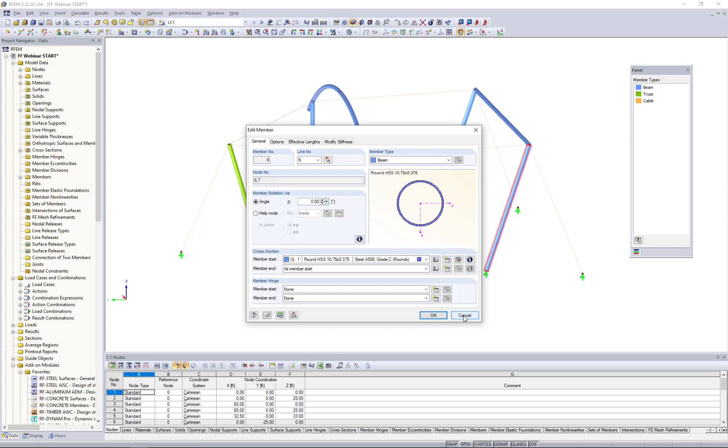What else we have in the model, which is a little difficult for you guys to see, are cable elements. If I turn this into a wireframe view, you might be able to see those a little better with this orange color. These cable elements are required to essentially hold up these frames before we have even applied the membrane, fabric membranes to the structure. This is true for out in the field as well. They provide stability for our columns and our center frames here.

If I double click on one of these elements, you'll see that the member type is set to cable. I've defined them as 5/8 inch diameter, and I've also applied my own user-defined cable materials. If you don't see the applicable cable material within the program RFEM, then you can always create your own user-defined material, and this information should come directly from the manufacturer.

Once we have modeled this starting structure, I think it's important to make sure that we run a simple load case. In this case, we'll run dead load or self-weight, just to make sure that the structure is able to stand up on its own and has stability. Again, this is all before applying those fabric membranes to the top of this tent structure.

We can go in here to our load cases and combinations. You'll notice that I have already created the first load case, and we can call this dead load. The self-weight is activated as -1 in the Z direction.

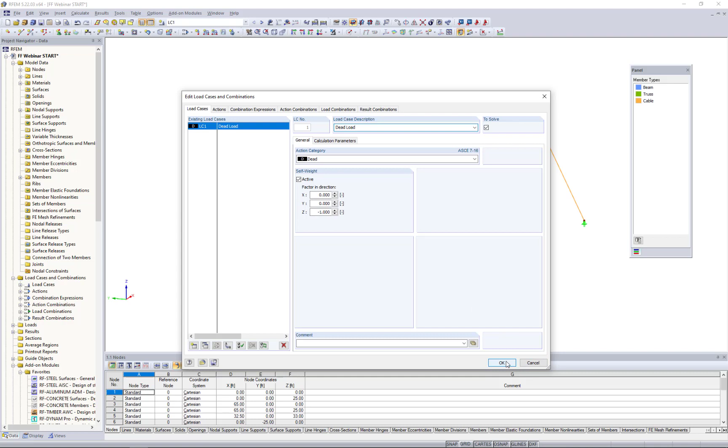So once we have applied this self-weight load case, we can run the calculation, which I've already done within this saved model, and we're presented with our global deformations. The fact that the model has solved is certainly a good starting point. We know that there is stability within the main structure here.

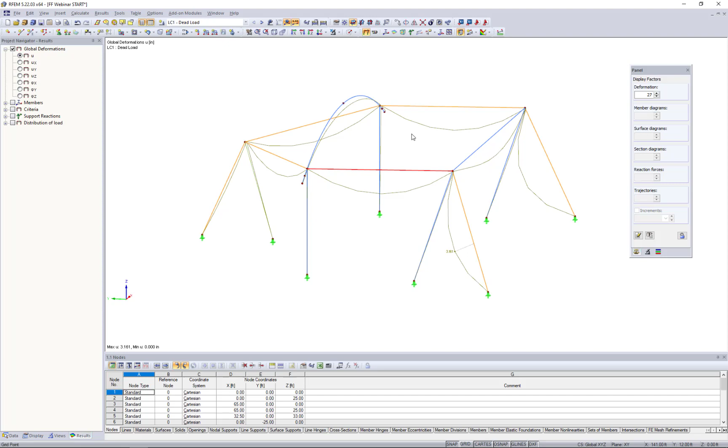Now, of course, when we're looking at the sag displacements here for our cable elements, this certainly isn't ideal, but we'll go ahead and address those a little bit later on in the presentation. Essentially, like I said, we wanted to make sure that we had stability here for the main structure.

So to begin modeling the fabric membranes and the boundary cable elements, I'm going to start off by selecting this node at the bottom of my frame column. I'm going to use my Move Copy tool, which we can find up here within our toolbar. We're going to create one copy, and then we simply apply the displacement vector. In this case, it will be negative 6.5 feet, negative 15.75 feet, and 8 feet. I click OK, and now you can see this arbitrary node created in between those two frames.

I'm going to draw a new line element, and a line element is exactly as it sounds. It's not necessarily a member, it's not a surface, it's just a simple line element defining some additional boundaries here. So I'm going to snap to that node that I just created, and we'll snap up to the top of our frame. On the right hand side, we can right click to exit these dialog boxes, so just a simple triangular shape shown here. I'm going to take that newly created node and use the Move Copy tool once again.

To create one copy, my displacement vector this time in the X direction is going to be negative 3, 3 in the Y, and in the Z it will be negative 8. The purpose for this node is we want to eventually create those fabric membranes here, but we need to anchor them down to the ground.

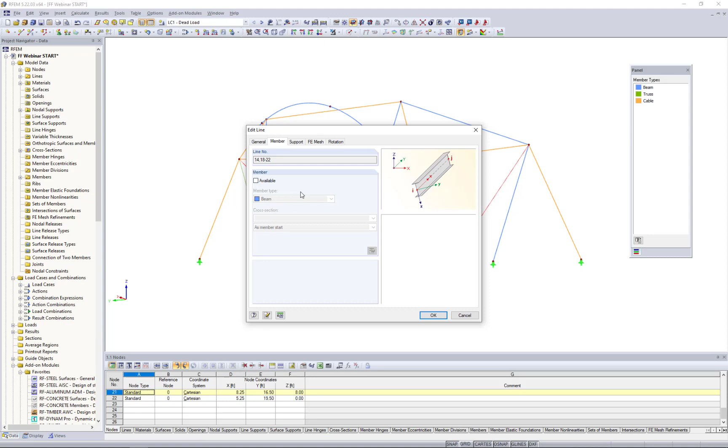Okay, so currently these are just typical line elements as we mentioned. What I can do is to highlight to select them, hold down my Control key, select the adjacent 3, and I'm going to double click on these line elements. We have the ability under this second tab to assign a cross-section and material to the line to convert it into a member. So I'm going to do that here, but instead of a typical beam type member, I'm going to create a new cable element.

Now, typically I could create this cable element, assign a new cross-section, maybe a new material, but I already have cable elements defined within the model, and I want to use this same diameter, this same material, so I can simply select it from my drop-down box here.

I click OK. The program asks me to clear the results, that's fine, and now you can see the member information is given to me within this dialog box, and these lines are now orange to indicate that they are cable elements. We'll take these same 6 cable elements, we'll highlight them holding down our Control key, and we're going to take advantage of our mirror tool.

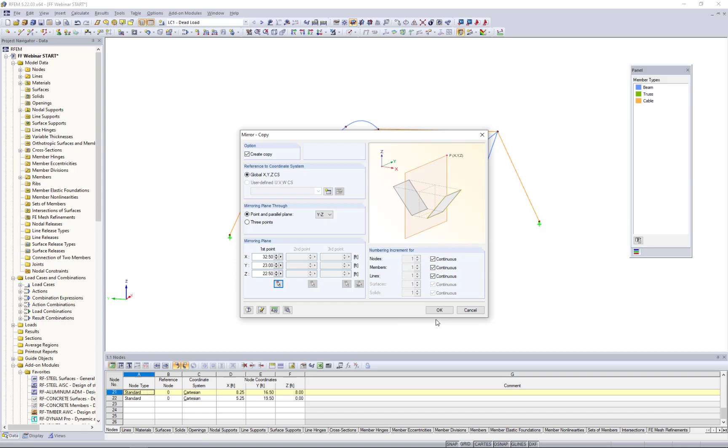The mirror tool can be found up here in the toolbar. What this allows me to do is to create a copy by mirroring about the YZ plane, and I can select the point to mirror about. For this, we can just choose any point that's at the center of this structure, and we could choose the top of the center column, for example. You'll notice the coordinates are automatically populated for me here.

Rather than having to redefine that geometry on the other side, we simply copied over those cable elements to the other side by using the mirror tool.

Now the final thing to do with these boundary cables is to apply supports to the bottom of them. You'll notice that the rest of the structure has nodal supports applied, and the type of support here is just a typical pin. You can see that I have fixed translation in the X, Y, and Z, but I have released the moment about X, Y, and Z.

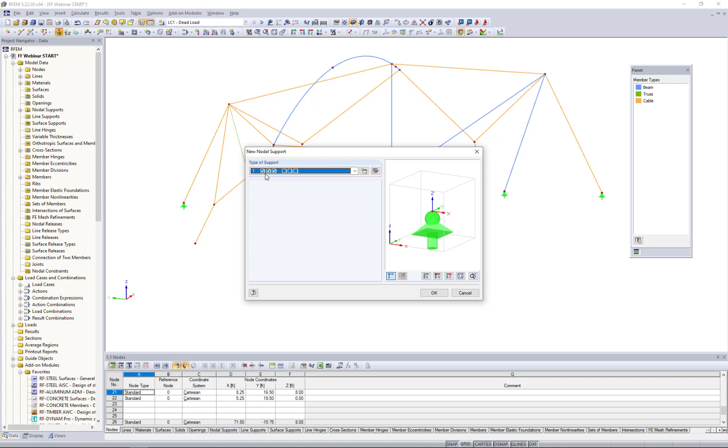So sticking with the same methodology, I can apply that same nodal support to the bottom of these anchoring cables by going up to my tools and choosing new nodal support. I don't need to redefine that definition type since we already have it available in our model, so I can use the drop-down box to select my pin support. I click OK, then simply click on the bottom node of those anchoring cables, and now we have all the supports applied.

This really finalizes the cable elements, and what we'd like to move on to next are the fabric membranes, which will be created with surfaces, 2D surfaces within the program.

Now the problem with all of our surfaces available here in the drop-down is this makes the assumption that the surface will be in a single plane. For our complex structure today, the surfaces certainly won't be in a single plane. So instead we can use a tool a couple down - we want to apply a new quadrangle. A quadrangle does not require the surface to be in a single plane, and we'll see this as we begin to model here.

Now we want to define a new material for our membrane, so we'll select new material and give it a description of membrane. The material model will be selected from the drop-down as orthotropic elastic 2D, which allows us to define two different stiffnesses in both the X and Y direction.

This information should come directly from the manufacturer for whatever fabric material you're using. Let's say our manufacturer has given us the stiffness in the X direction as 1 gigapascal, but notice my units here are KSI. So a nice trick within the program: if you don't want to manually convert gigapascal to KSI, type in 1.0, then manually type capital G, capital P, lowercase a for gigapascals. When I click in the next cell, the stiffness is automatically converted to KSI, 145.04.

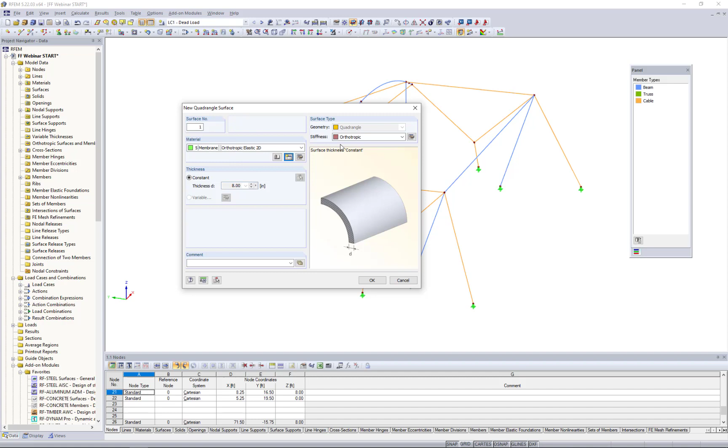So now we have defined those material settings for my fabric membranes. We want to change the stiffness type to membrane orthotropic, and go into the detail settings. Under the second tab is where we'll set the thickness of the membranes at 0.04 inches, and I click OK.

So now that we have defined the material as well as the stiffness properties, I can click OK, and now we're ready to begin to define the boundary lines of this surface. For this, I'm going to orient my model in the plan view, choosing the reverse Z direction from my drop-down box here.

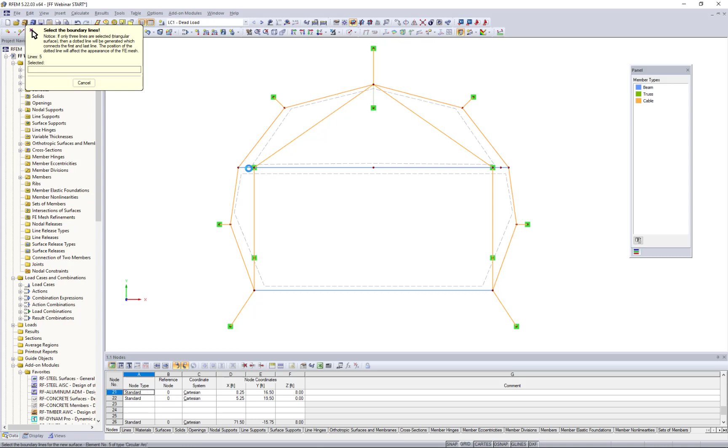To define my first membrane, I'm going to select the members, including the cable elements, that make up this first membrane. Once I close the loop here, you'll notice a dotted line, indicating my first membrane. We'll do the same at the front of the structure, selecting each member in order, and once we close that loop, we should see a dotted line up at the front.

So I can right-click to exit. Let me turn this back into an isometric view, go back into a rendered view, and we can see those fabric membranes applied to the structure—certainly not in a single plane. That's the advantage of using that quadrangle feature.

Now, everything I have modeled so far has been completely straight lines. The cable elements are straight, our fabric membranes are straight lines, and realistically, once we apply pre-stress, we're going to see biaxial curves for our fabric membranes. Our cables may have some catenary shape to them.

This is where we want to take advantage of one of the add-on modules available within RFEM called RF Form Finding. This add-on module allows us to define predefined properties such as pre-stress forces, cable sags, and so on, and it will find the deformed mesh for us before we continue with the static analysis.

A simple way to explain this: the cable elements are completely straight. Form finding will allow us to define a cable sag, for example. We run the form finding process, and then the program will come up with the catenary shape for us.

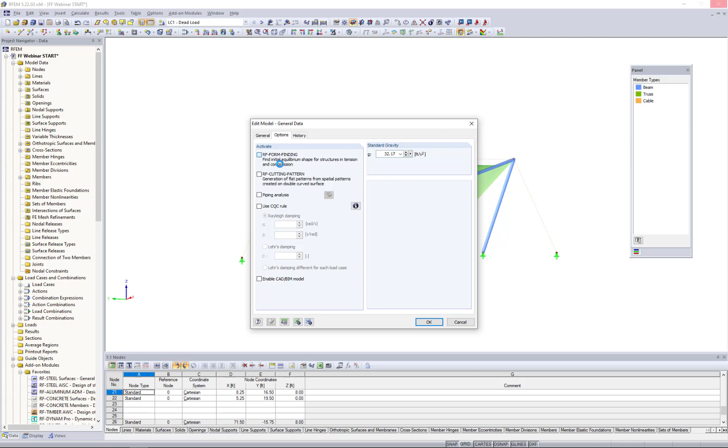To activate form finding, I go to my project navigator and right-click on the model name to access the general data. Under the Options tab, we have RF Form Finding. I simply check this checkbox, and the program will activate this add-on module within my model. I click OK—nothing has changed yet, but we'll see in a minute the features it has released within RFEM to allow us to run that form finding procedure.

I'm going to go to a plan view once again, the reverse Z direction, and turn this into a wireframe view. I'm going to select my two cables in the rear here by holding down my control key, so we can see them highlighted in red. I'm going to double click them.

RF Form Finding has now given us the ability to edit the member type—this was previously not available to us. We can define the cable target length, the sag, or the pre-stress force within the cable. For these two rear cables, I'm going to assign a pre-stress force of 0.225 kips.

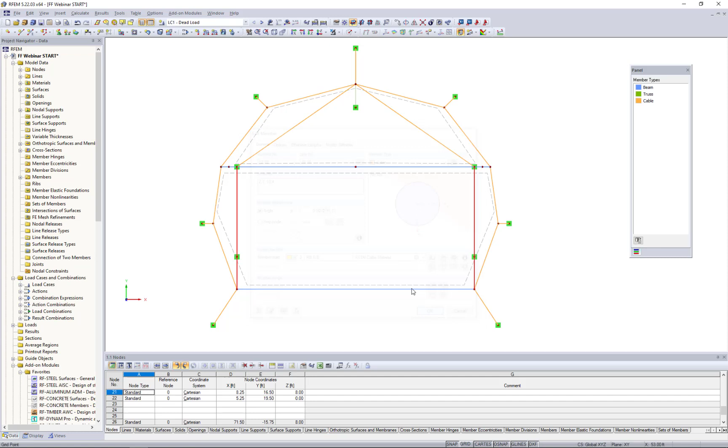When I click OK, nothing has changed so far—we're just defining these pre-stress forces. What I want to do is the exact same process for my front three cables as well as my two rear cables. Remember, this is all part of the primary supporting structure.

I double click on these elements and go into the detail settings here. For these, I'm going to assume that the pre-stress force I place in these cable elements spanning between my two frames will inevitably impact the rest of these cables for the supporting structure. So for these, I'm going to set the target length to 100%—as I modeled them now, I don't want that length to change. I click OK.

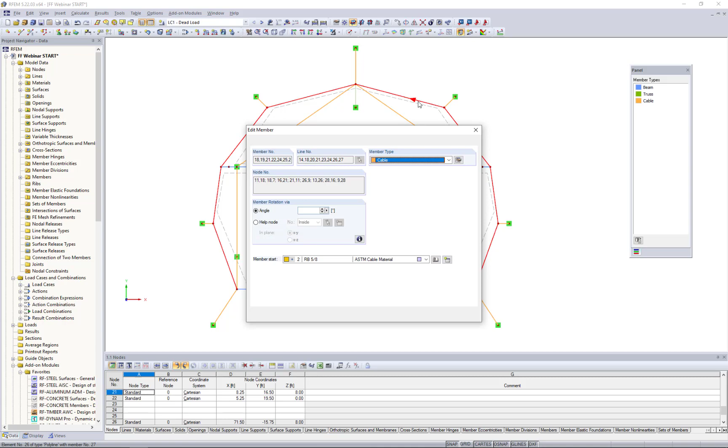I'm going to move to my boundary cable elements on the exterior of the structure. Remember, these are useful for defining the boundary conditions of the fabric tensile membranes. I can double click on these and edit them. For the properties here, I will define a target cable relative sag of 10%. We can also refer to this picture over here on the right to determine what the sag should be set to. I click OK.

Finally, our last four cables are the short anchoring cables that attach the fabric membrane down to the ground. I double click on these, edit the detail settings, and set a pre-stress force quite a bit higher, at 6.75 kips. I click OK. If we're curious to see visually those pre-stress loads defined, I can select RF Form Finding from my drop-down box here and turn on the display of my loads.

So we can see how those pre-stress defined loads apply to each cable element. This is just a good way to check to make sure we didn't miss any of those cables.

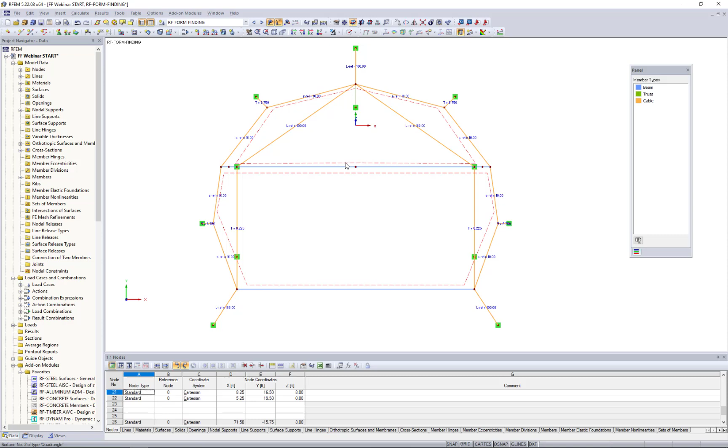Now, similarly, we want to apply some pre-stress settings to our fabric membranes. For this, I'm going to select my two fabric membranes by holding down my Control key, and I'll double click on them.

Now we've already been within this dialog box before. Remember, we set the thickness of our membranes here. But what we did not see before was this form finding tab, and this allows us to define a pre-stress force or stress in the warp and weft direction, which is the X and Y axes of our fabric membrane.

Now we will be applying a standard calculation method. The projection is more for conical type structures, so standard is more for flat elements. We do want to apply a pre-stress force, and we'll actually just keep this as the default of 0.07 kips per foot. And I can click OK.

So once we've applied those pre-stress settings, what I can do is go back into an isometric view. Let's turn off the display of our loads. Let's go back to a rendered view. And we want to have RF form finding selected from our drop-down box here.

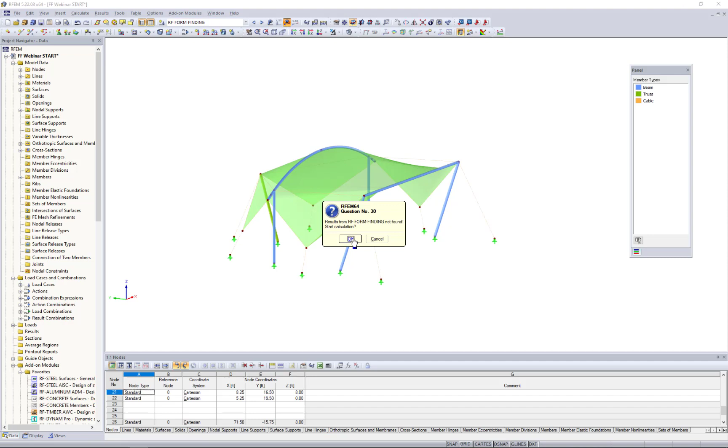I'm going to start the calculation by clicking on this Show Results button. So what the program's doing now is just applying all of these predefined pre-stress forces from our cable elements as well as our fabric membranes to the structure, and then it's going to come up with the relevant shape for us. So we can see the initialization of the calculation method here, and we should see a progress bar as well, just showing us the max displacement for every iteration.

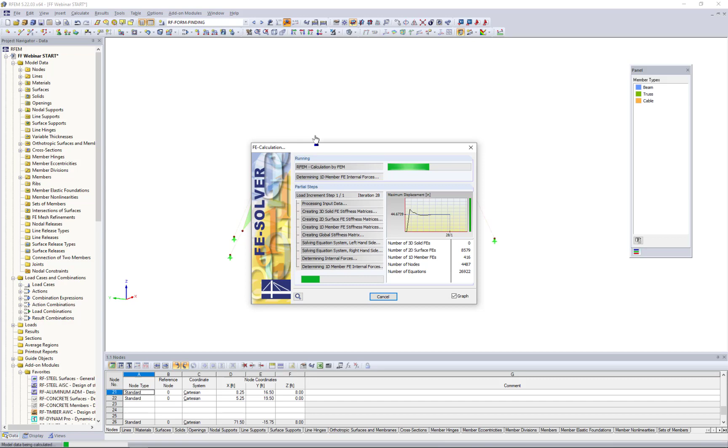So after this iteration is complete, what we'll be presented with immediately in RFEM is the deflected shape. Now what you'll notice is that my FE mesh, which is displayed here, now has this curvature to it. Again, the cables have a catenary shape, and the fabric membrane has biaxial curves. This would be the FE mesh that we would move forward with then for the additional static analysis.

Now, before I do, I want to explain a little bit about the results that we have available to us here. Under the Results tab, we can go ahead and collapse most of these trees, and we want to take a look at the surfaces tree, in particular the shape for the contour lines. So we can compare this to our colored panel over here to see where we have higher contours versus lower contours. We can view inclinations.

For example, we'd expect higher inclinations here where the fabric membrane is a little bit more vertical than our flat membrane up at the top. So this is just a way to double check this form finding shape.

Now, with that said, going back to the deflected shape here, maybe we change our deformation factor to 1.0. I'm going to take a look at the elevation view. And the rear part of the structure looks fairly adequate for the curvature that I'm seeing, but the front part of the structure, I'd really like to see a little bit of a higher curvature here.

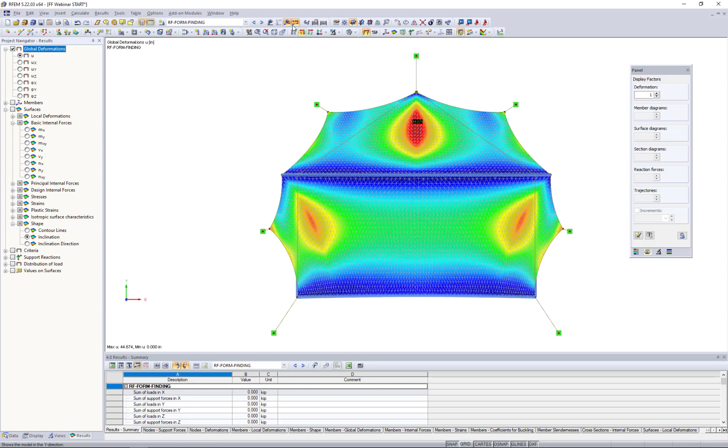So that's fine, we just need to manipulate maybe the pre-stress settings. But also I want to point out, if we go into an elevation view and maybe I turn off my results here, let me also turn off my FE mesh. I'm going to right click to turn on the local axis system of my membranes.

So remember, for our membrane material that we got from the manufacturer, the material is actually a bit stronger in the X direction versus the Y direction. So you can imagine that this is really important then for the placement of our local axes for these membranes and in which direction they span.

Currently we have the X direction spanning parallel to our main frames here, and the Y direction is perpendicular. What I'd actually like to do is to rotate that. I want the Y direction to be parallel to these frames.

So I can do so by selecting both of my membranes, double clicking them, and under the Axes tab, you can see that we have the ability to set the local Y-axis parallel to a line that I can choose within my model. And I can just choose either one of the frame beam elements, line number 8 here.

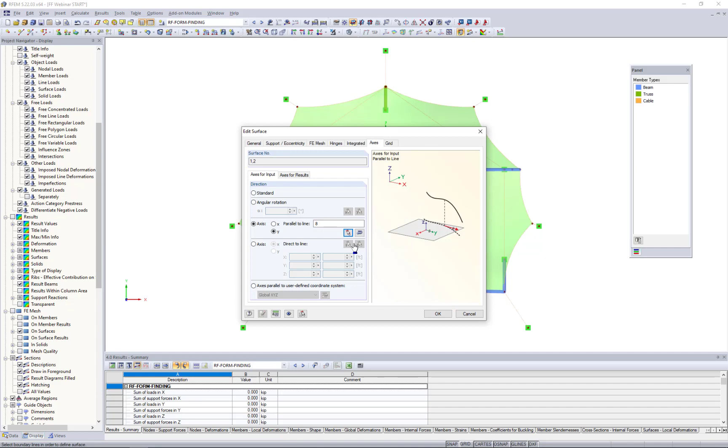I click OK. Through these dialog boxes, the program tells me it has to clear the results. And you'll notice now the Y-axis is parallel to those frames, the X-axis is perpendicular.

Now, in addition to this, I'd also like to go back to this General tab, and under the membrane settings and the form finding tab, increase the pre-stress force in the y direction. By manipulating the orientation of my x and y axes, I now have the ability to set a different force in the warp versus the weft direction. So in the y, we'll double this to 0.14 kips per foot, and leave the x orientation the same.

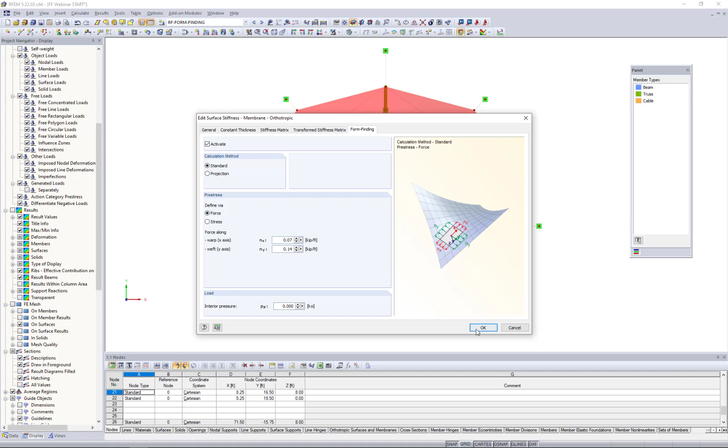I can click OK through these dialog boxes, and what I'd like to do again is apply the RF form finding calculation. I've made no changes to my cable elements, so those should stay the same, exactly how I had them defined before with the sag and cable length. We just modified the orientation of these surfaces as well as increased the predefined stress in the y direction.

Once the program has solved for this new shape, we'll again be presented here with our deflected shape in RFEM. I can right click to turn off the local axes of the system. We're currently looking at the deformation. Let's take a look in the elevation view, and change the deformation factor back to 1.0. You can see a nice curvature here in the front, a little bit higher than what we were previously seeing before.

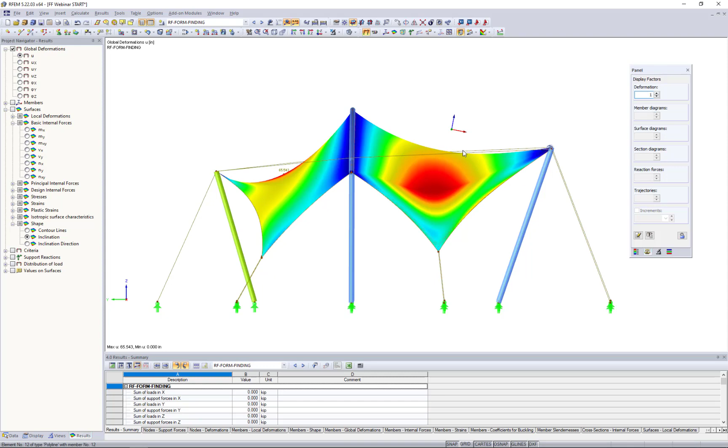The other thing to check are the surface internal forces. For our NX forces, this would be the tension along the local x-axis, we should see about 0.07 kips per foot, because remember, this is a pre-stress force that we applied. Although it varies slightly, the average here is about 0.07 according to this color panel. In the NY direction, it varies a little bit, but as we'd expect, the average value is about 0.14 kips per foot.

So just to compare the pre-stress force to what we're actually seeing after the form finding process, everything looks good. This is the new shape that we're going to move forward with for the additional static analysis. So the next load case that I'd like to run here is snow load.

I'm going to go up to my load cases and combinations. We're going to create a new load case here, and this one will be called snow load with the action category set to snow. I click OK, and make sure that I have snow load selected in my drop-down box up at the top.

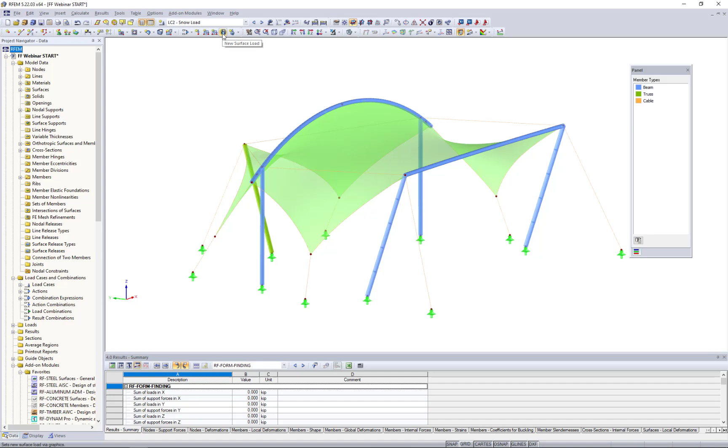We want to apply a new surface load, and we can do so within our toolbar. We have new surface load here. For the snow load, I'm going to apply this in the projected Z direction. So we might be wondering, what's the difference between the projected Z direction versus related to the true area?

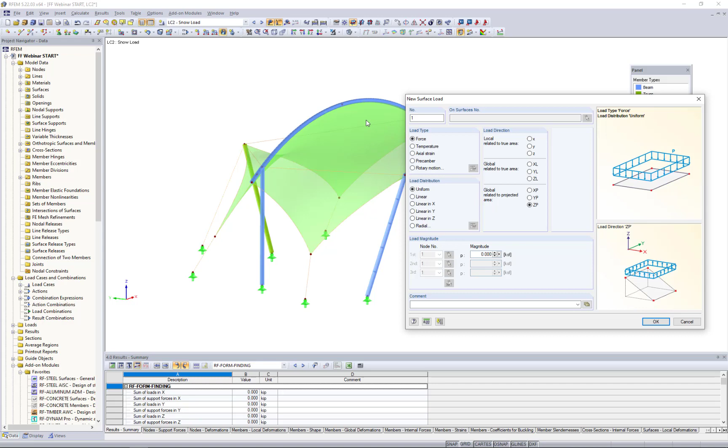With the projected, this will actually take into consideration the angle of my fabric membrane. So we'd expect with snow loads, the snow would probably slide off when we're looking at the edges here of our fabric membrane that are almost vertical. But up at the top, where we have a pretty flat area, we'd expect to see higher snow loads. So that's what the projected area allows us to do.

The magnitude here is going to be fairly small, negative 0.006 kips per square foot. The reason for this, maybe we don't expect this tent or canopy to be operating during the winter, but we still want to account for some snow load. I click OK, and then it's really just as easy enough to select my two surfaces here. Now you can see the surface loads applied to the top here in the projected Z direction.

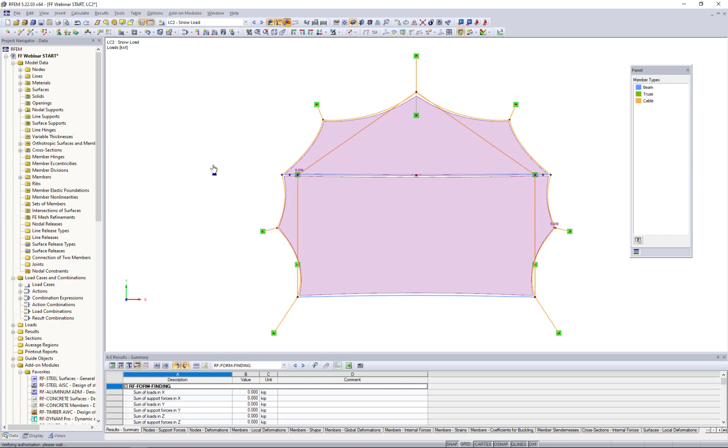We also can view a plan view, and I'm going to go to a wireframe view. Those same area loads have now also taken the shape of my new form finding mesh here. So we can run a quick analysis for snow load. The program, again, doesn't need to solve for the form finding shape, we already have that. It's just simply going to apply the snow load here in 5 load increments, and eventually we'll be presented with our results.

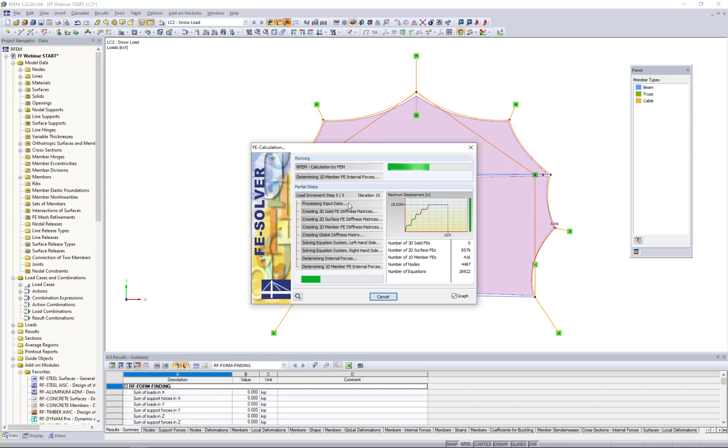I like to do this just to make sure that the load case we've just applied makes sense with the deflected shape. We don't have any modeling inconsistencies. So once this is done solving, again, we'll be presented with our results here.

Let's go back to an isometric view and take a look at the global deformations, with the deformation factor set to 1.0. So as we'd expect, we have higher deformations at the top here, where we're going to see more snow load accumulation, rather than out at the exterior where we have steeper angles. So everything looks okay there.

All right, so the next thing to move on to are wind loads. And for this, we're going to utilize one of our new programs called RWIND Simulation, which runs a computational fluid dynamic analysis. Essentially, we're going to take this structure, integrate it within the standalone program RWIND, and put it inside of a numerical wind tunnel.

The purpose of the numerical wind tunnel, if we relate this to ASCE 7 or any other international standard, is that it's quite clear how to apply minimum design loads for basic rectangular buildings, even dome structures and silos. But when we're getting into fabric membrane structures with unique geometries, it's incredibly difficult to determine what these minimum wind loads should be from the standards.

The basic wind speed comes from the ASCE 7 wind load maps. For this, I'm going to access the Dlubal website. Under Solutions, we have what's called the GeoZone tool. We've incorporated many different standards, including ASCE 7 and NBC 2015, as well as many other international standards. We've taken those maps for snow load, wind, tornado, and seismic, and integrated them with Google Maps technology so you can type in the address of your project location to pull that information directly from those standards—a little more helpful than manually flipping through tables in the code.

For today, we're setting the risk category to 1. We're using the ASCE 7. We're selecting the wind load here.

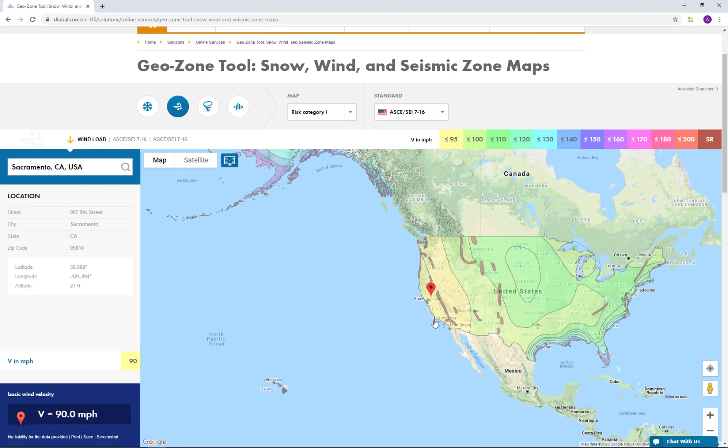Let's say my project for today is located in Sacramento. So I can type in Sacramento, California, and you can see a pin is dropped here with the location. My basic wind velocity is given at 90 miles per hour, so this would be the information back in RFEM that I'd want to input for the basic wind speed. You can see my wind velocity profile automatically updated.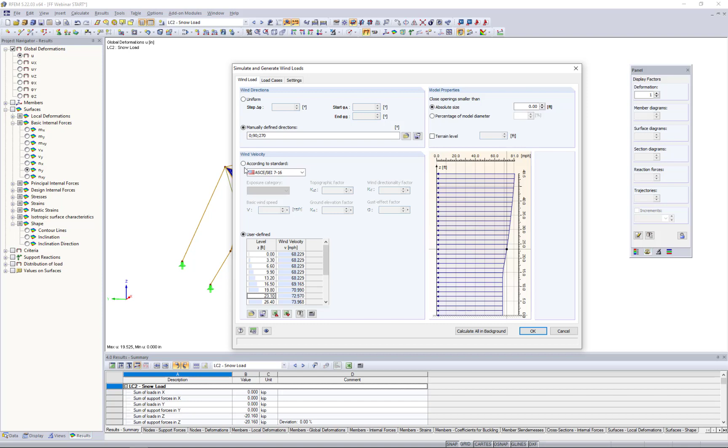This is the wind speed that is entering the numeric wind tunnel. Now, we don't have to use a standard - we can select user defined here. We can import and export from Microsoft Excel, or you can manipulate these values that were already created. So that's an option if you don't want to use the predefined standard.

The load cases tab, you can see here we have 0 degrees, 90 degrees, 270 degrees. These are the 3 load cases that will eventually be generated within RFEM that I can combine with my additional load cases such as snow load, dead load, live load, and so on.

The settings tab, in particular let's talk about the flow parameters, the density and kinematic viscosity. These just control the air properties flowing within the numerical wind tunnel. The calculation parameters here are for the density of the mesh within the wind tunnel.

The level of detail here is for the shrink wrap mesh that will encompass our structure. The higher the level of detail, the higher the percentage for the density of mesh. Sure, the more accurate your analysis is going to be, but keep in mind the longer your calculation time will also be. So there's a happy medium here to make sure your results aren't changing too much when you increase these values, but you're not waiting hours and hours for the calculation to solve when it's not making much of a difference.

The load case to be generated will start at load case number 3. Remember, we have dead load as load case number 1, load case number 2 is snow load, so load case 3 will be our first wind load.

We have some turbulence and turbulence intensity settings over here on the right. The member load distribution - these will be brought in from our wind as concentrated loads. We also have the ability to define uniform or trapezoidal loads instead. This will make sense when I actually show you these loads shown graphically later on.

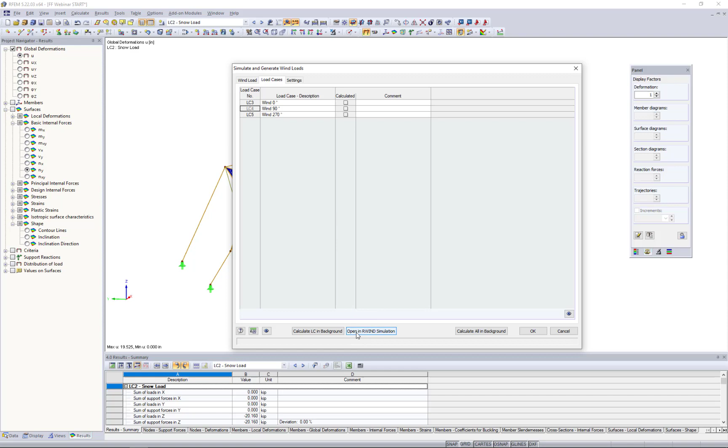Because it does take just a minute to solve, I've gone ahead and solved for one of these particular wind load cases, and I've chosen the 270 degree. I wanted the wind to flow in this numerical wind tunnel, which you can see here, from left to right through this large opening. As I mentioned, the RFEM model is completely exported into this numerical wind tunnel.

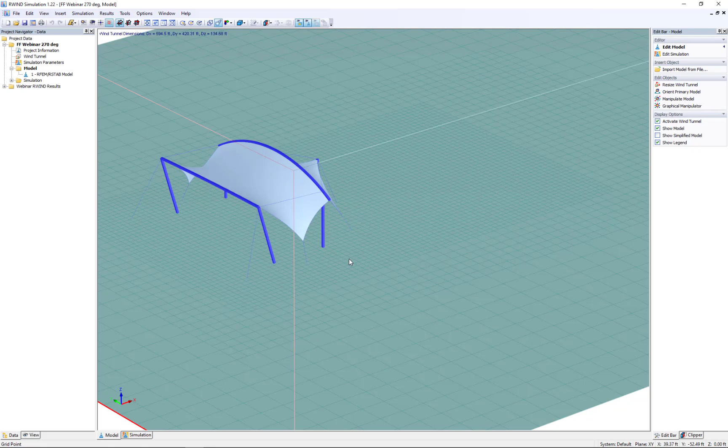We even have the curvature here from the form finding process, so everything is accurately represented. The wind tunnel mesh out near the edges is pretty coarse, but as we move closer to the model you can see that it's more refined here. That's kind of what some of those settings I showed you will control.

So when we run the analysis under this simulation tab, this will take just a few minutes to run, so that's why I pulled up this already saved model. You'll see the surface pressure.

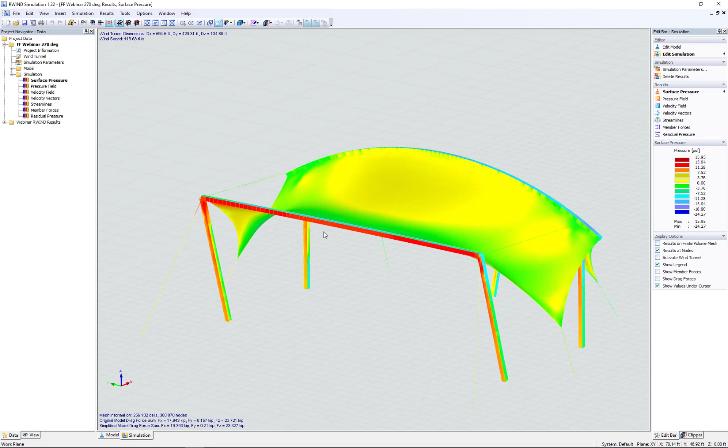The surface pressure, if I zoom in here and hover over my mouse, will show me that the highest pressure I'm seeing is up here on that front frame as we see the wind loads move from left to right. We're also seeing some high pressures here as our tent increases in height.

On the back side, we're actually seeing negative pressures. This means there's uplift occurring, which kind of makes sense - we're going to see the wind loads pass underneath this structure and push up on the back side of the fabric membrane. We'll get back to this in just a minute, but I do want to display the pressure field here. The pressure field is my second option where I can view the wind pressures around the model.

It takes just a second to populate, but you can see we can eventually view the pressure field, and we can slide this around the structure to see the pressure updated in real time. The Show Reduced Domain checkbox, if unchecked, shows pressures for the entire wind tunnel, which probably isn't of interest since we'd be seeing pressures way out there. That's why by default we have this Show Reduced Domain option.

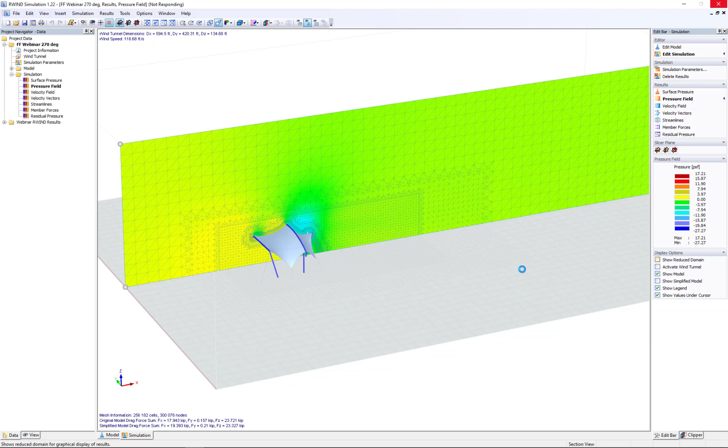So we'll reactivate that, and next I want to show you the velocity field. In a similar manner, we're going to see the wind velocities around the structure in feet per second. I can slide this and change the planes of the velocity field to see these velocities.

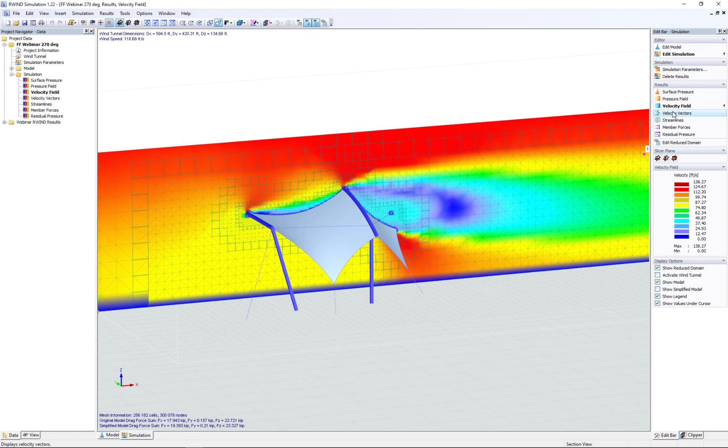At the back of the structure that were causing that uplift. The velocity vectors, if we turn this to somewhat of an elevation view, it might be of interest because what we're viewing is not only the magnitude of velocity in feet per second, but also the direction. Again, seeing that uplift pressure in the back caused by these velocity vectors, and the velocity passing over the structure and through.

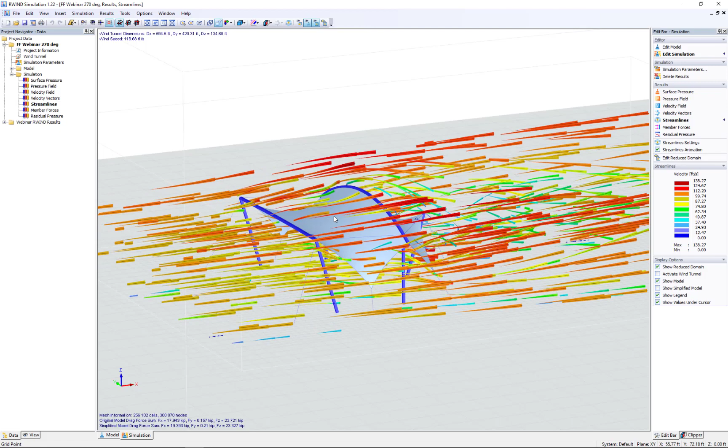Probably everyone's favorite would be the streamlines. It takes just a minute to populate, but it's going to show the direction and magnitude of the wind loads. Let me zoom out so you can get a better look, and you can see these streamline particles passing around the structure, showing the exact path they take. We can also activate the streamline animation, viewing how those wind particles pass over and through the structure and circulate in the back. I'll get back to some of these animations and different result views a little bit later on.

But the most important thing to remember from this analysis is the surface pressures. This is what we want to get from our wind simulation on our structure.

So going back to RFEM then, I'm going to cancel out of this dialog box and jump to an already saved model. Again, it takes about 10 minutes or so to solve for these three different load cases.

We will see under our load cases and combinations 3 new load cases generated, including 0 degrees, 90 degrees, and 270 degrees. So you want to select all 3 of these and redefine them as wind load, which tells the program to incorporate these into the ASCE 7 wind load combinations.

The Actions tab shows we have dead load, snow load, and wind load. This is important because we now have 3 cases under wind load, and we want them to act alternatively, not at the same time. The program has already assumed that, setting them to act alternatively so we shouldn't see 2 of the wind load cases acting together.

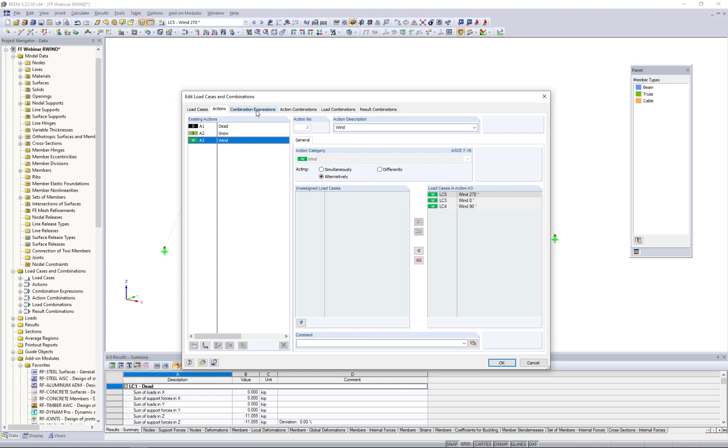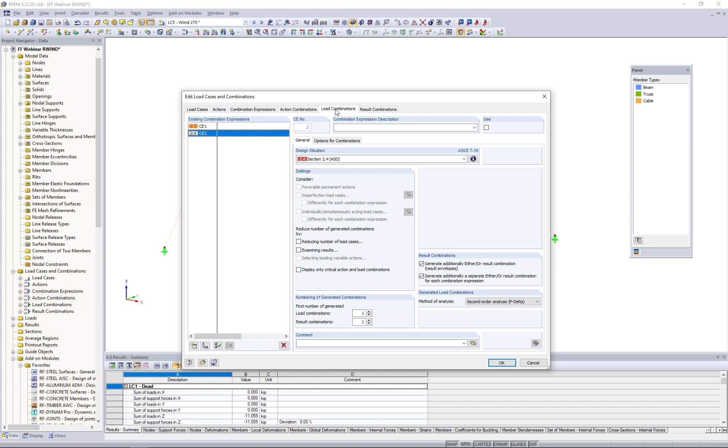The combination expressions are my ASD load combinations as well as my LRFD load combinations generated from the ASCE 7. LRFD is listed first, but second I have my ASD load combinations. I've actually unchecked this use checkbox since I'm not really interested in checking deflections today, so we'll keep this simple with only LRFD load combinations. Under the Load Combinations tab, we can see all of those LRFD load combinations individually listed out with dead load, snow load, and wind load.

Notice under the calculation parameters, everything is run according to a large deformation analysis. This is required because we have cable elements and fabric membrane structures within the model. We don't even have the option, since they're grayed out, for a geometrically linear or second order analysis. It has to be run according to a third order analysis when those elements are defined.

So what I'm going to do is jump back to the RFEM model and view our results for the wind load case. The first thing I'd like to show you is the actual applied loads that we're bringing in from our wind.

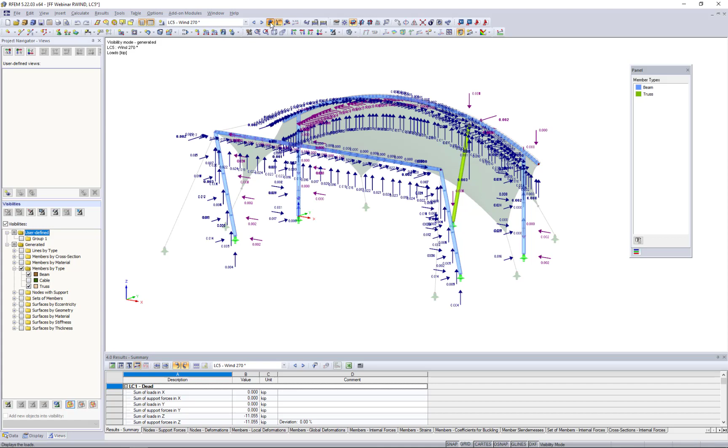Under the Views tab, we can activate our members by type, and I'll choose only my beam and truss members, and turn on my loads for 270 degrees. You can see that at every FE mesh point, I have point loads in the X, Y, and Z direction. This is the loading information brought in from those surface pressures within our wind simulation.

Now, this is being applied at every FE mesh point within the model. Let me deactivate this view so you can actually see what's going on. It's a little bit overwhelming—we have many FE mesh points here at the fabric membrane, and at every one of these points, X, Y, and Z loads are being applied. So we'll just turn off this view of the loads.

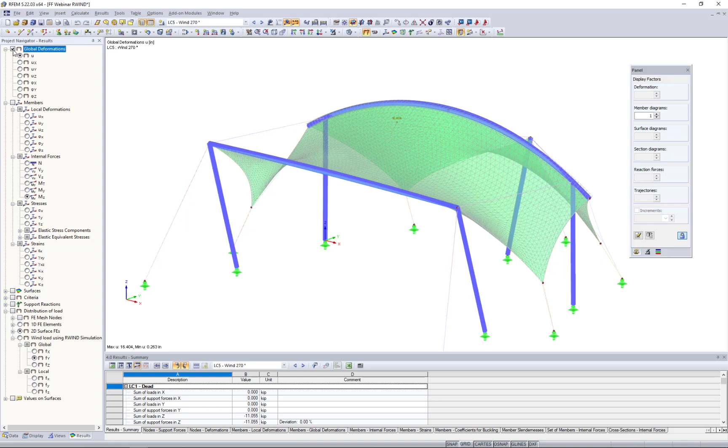Let's take a look at the results once we run the load case. I've already done so and saved the results. We're first going to view our global deformations, which will give us a better understanding—we can see in the backside of the structure that uplift occurring, and we have pressure towards the front membrane here, exactly as we would expect when wind is flowing from left to right.

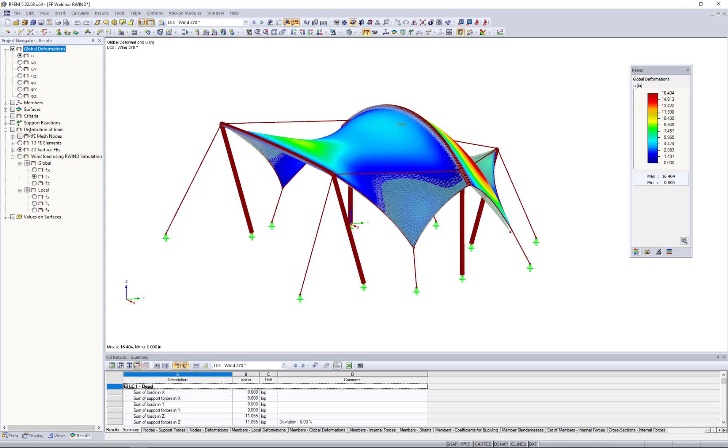Now, I mentioned that the view of the loads is a little overwhelming, so how can we be sure the correct loads were applied? What's beneficial here, if I collapse some of these trees, is to take a look at the distribution of the load. I can view this for the global X direction, viewing the distribution in kips per square foot for this wind load case, but also in the Y direction. We can see pressure acting towards the membrane at the front of the structure, and in the rear we have positive values for uplift or tension forces, away from the fabric membrane. So instead of displaying the loads, we can solve and look at the distribution instead.

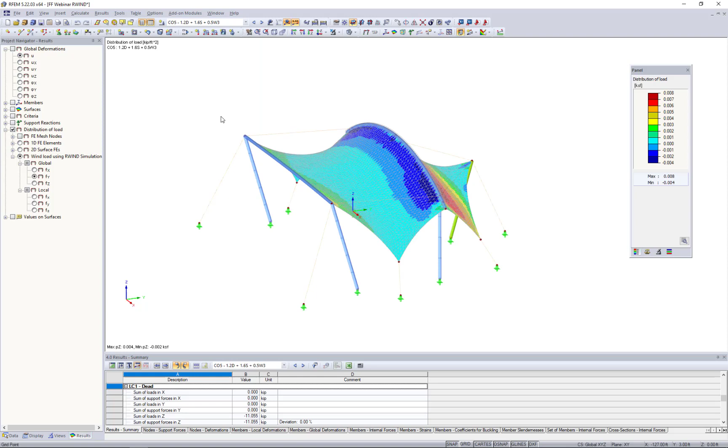Now, as I mentioned, we want to incorporate these wind loads with the rest of our load cases, such as dead load and snow load. Let's take a look at load combination number 5, which includes dead load, snow load, and the same wind load. Once we solve for it, we can take a look at our deformations, and everything acts as it should—notice we have some additional deformation in the vertical direction due to those snow loads and the self-weight.

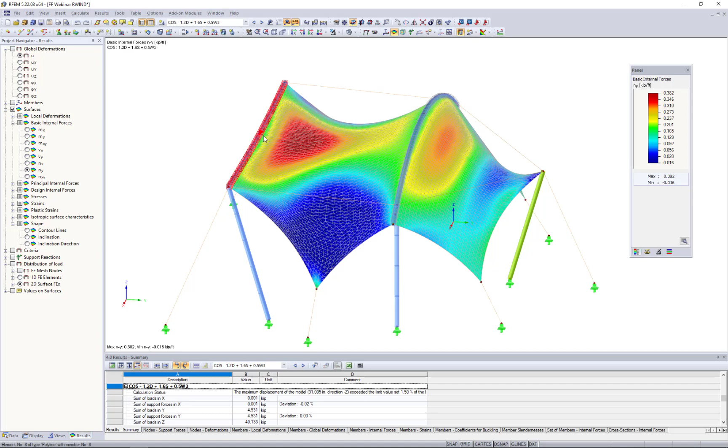What I'd like to check here under the surfaces are these NX and NY forces. So we're currently viewing NX forces in kips per foot—these are the tension forces within the membrane. This is something we want to compare to the capacity of the fabric membranes to make sure they're not going to fail or tear, information we'd compare to what's given from the manufacturer. Same thing for NY—these are the tension forces in the local Y direction of the membrane, and we can get all this information graphically as well as within the tables.

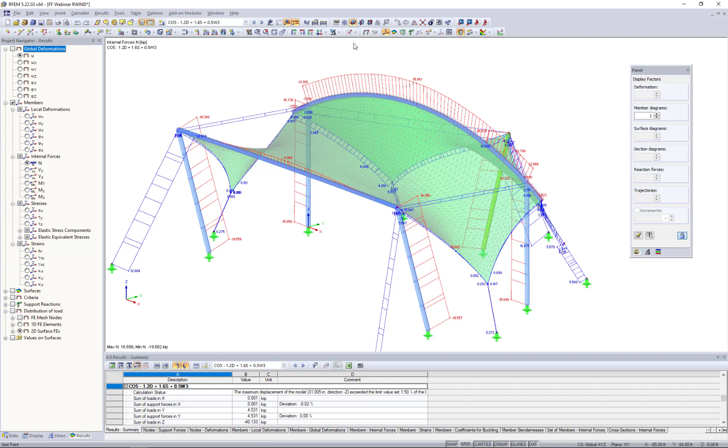In addition to the surfaces, we probably want to take a look at our supporting members. So we can expand our members tree, and maybe view the axial forces—I'll turn this into a wireframe view. We're going to see axial or normal forces within our cable elements and frame members. This is information we need to make sure these cables aren't going to fail. For our frame members, we can also view shear forces in the weak and strong axis direction, as well as bending in the strong and weak axis direction. This is the information we'd want to use to design the supporting structure.

Now, the huge benefit of RFEM is that we've not only run the form finding process—so all of those internal forces generated from the form finding pre-stress are transferred to the supporting structure—we've also incorporated it with our wind loads. And finally, we can design the supporting structure all within the same program with some additional add-on modules. So that's what we'll move on to for this example.

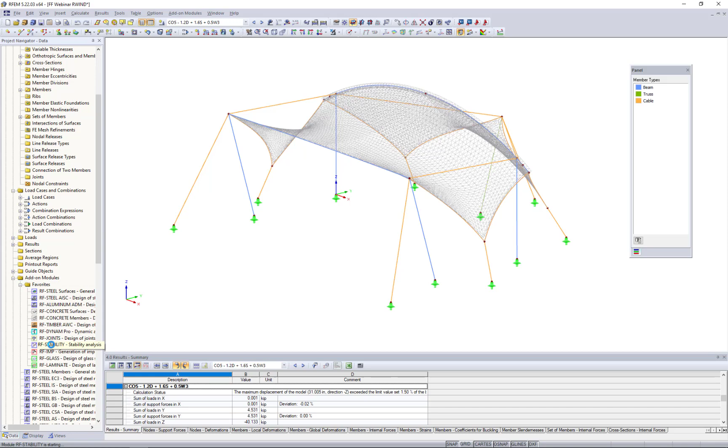I'm going to turn this back to a rendered view, and let me keep this in wireframe view. Let's take a look at our first add-on module called RF Stability. I can launch RF Stability from my project navigator on the left-hand side, and this module will allow me to run an eigenvalue analysis and determine the corresponding buckling mode shape. It's very powerful in what it can do. The number of eigenvalues we can solve for is set within this first option—the default is 4, but maybe we set this to 6 today.

You can solve 100 eigenvalues if you'd like. But keep in mind, the higher the eigenvalue number, the less likely we're going to see buckling modes that will really ever occur, because the critical buckling load factor will be so high. I'll explain that in just a minute. But really, we're probably most interested in these lower eigenvalues.

We want to import in the axial forces from either a load case or a load combination. For today, I'm most interested in the buckling behavior of my columns within my frame, so I want to import a load combination that creates the highest gravity loads, or normal forces, within those columns. So we'll select load combination 2 here, which includes both dead load and snow load.

I'm going to begin the calculation here, and I'll explain that these internal forces being brought in are nonlinear—we're including the form finding process for those cable elements. We are running a linear eigenvalue analysis, which we can see on the right hand side. We do have the ability to run a nonlinear analysis, which may be suggested if our critical load factor is less than 10, or if we're just looking for more accurate results when it comes to including geometric and material nonlinearities within our model.

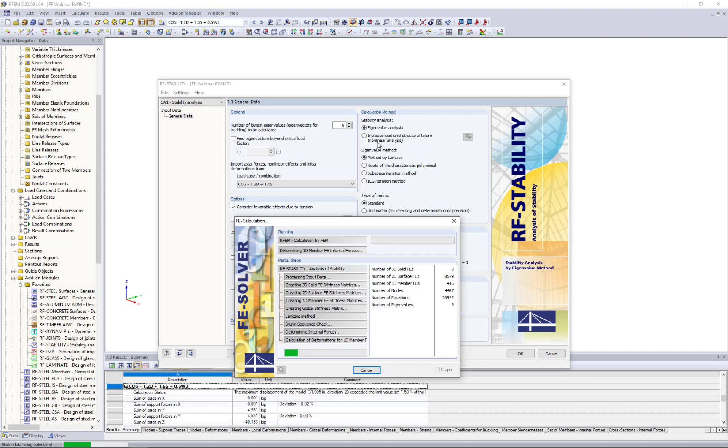For today, we're just looking for the general buckling behavior of the structure, so there really is no need to get a super detailed analysis. You might often find that a nonlinear versus a linear analysis isn't that much different.

Eventually we are presented with our results, and we have 6 different eigenmodes listed here within our results table, along with a critical load factor for each one. This critical load factor is the factor you can multiply load combination 2 by before you'll see the relevant buckling modes shown in the background here.

This is why, if you have a critical load factor less than 10, it may be suggested to move to a nonlinear analysis, just to make sure buckling isn't a concern for your structure. Now if you're seeing critical load factors less than 1.0, this is a huge problem—it means we can't even apply 100% of the loads from load combination 2 before our structure is buckling.

Quite honestly, you would not be able to solve in RFEM, because the program would flag you that you're exceeding the critical buckling load value, or capacity. So we could use RF-STABILITY to determine where our problem could be. These critical load factors are listed here, and the lower the critical load factor, probably the more of a concern it should be for that particular buckling mode.

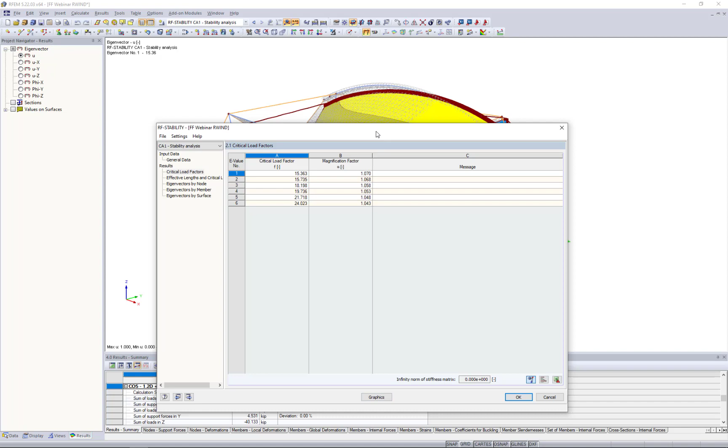The program is synced up in the background, so I can view these different eigenmodes and the behavior of my structure, or we can choose this graphics option here. I'm technically still within the RF-STABILITY add-on module, as we can see from my drop-down box here, but this gives me the ability to view these different buckling mode shapes.

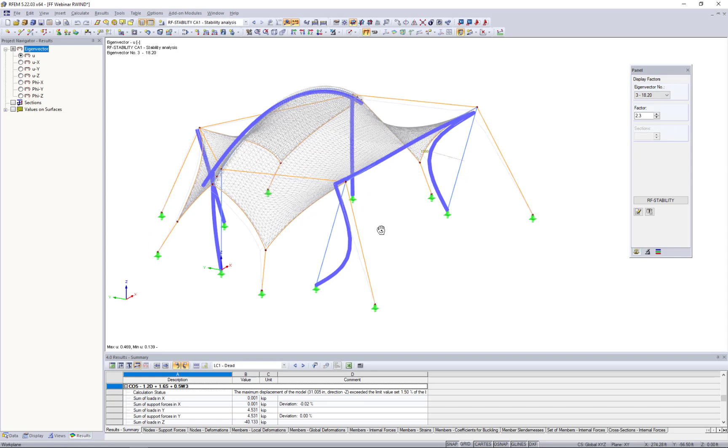From the first buckling mode shape, if we turn off our isobands, we can see the entire structure is kind of racking off to the right. Our second buckling mode shape would be buckling of our column elements. We have our third buckling mode, just a reversal of the orientation, and the fourth buckling mode shape shows the columns kind of buckling inwards here. So quite powerful in understanding the behavior of the structure.

Going back to RF-STABILITY, the other thing I want to point out, on top of the critical load factor, are some of the other information and tables available to us—more importantly, under effective lengths and critical loads. Notice for each member here we have 6 different eigenvectors, and the effective length factors are also given to us for each member. This is important if you're designing per the effective length method from Appendix 7 within the AISC standard.

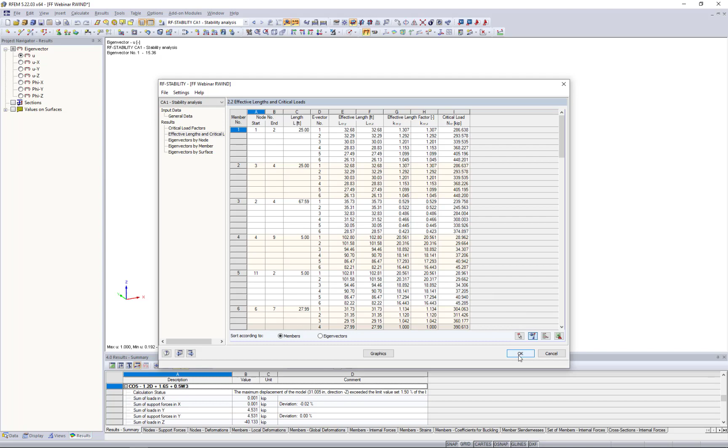We want to input the correct effective length factor for the AISC design, and generally these are given to us from the general tables for pin-fix conditions, but the program here gives you the true effective length factor for the strong and weak axis based on this buckling mode. So it can be pretty powerful, and I'll show you in just a minute how we can incorporate this with our RF-STEEL AISC add-on module. The stability design is generally covered, and now I want to move on to the steel design for these frame members. For this, we can launch RF-STEEL AISC.

I've done previous webinars devoted entirely to these steel modules, so refer to them if you're looking for a little bit more detail than what we can give today. I also want to let you know that the RF-STEEL CSA module for Canadian steel design follows the same workflow that you're going to follow with what I'm showing you today.

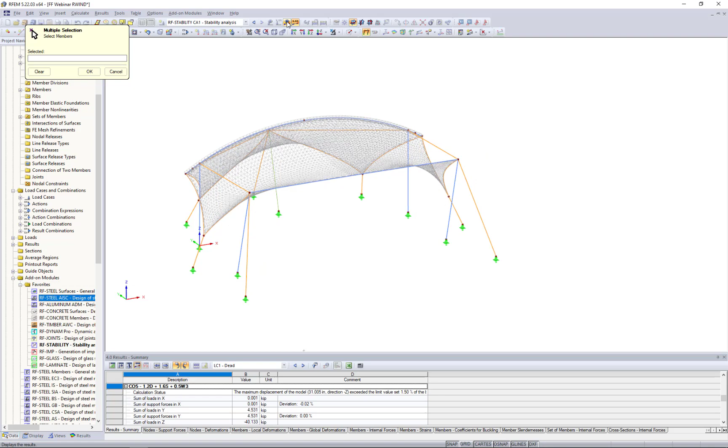We choose the design according to LRFD 2016. Then we want to choose the members that we would like to design. So I'm going to turn this back to a rendered view, go to our Views tab, and activate the members by type for only our beam and truss members. I've selected members 1 through 9 graphically to design here.

We will choose all of our LRFD load combinations for the ultimate limit state design. Now, serviceability - I'm not considering any deflection design considerations today, but normally we would move our ASD load combinations off to the right here. Then I can simply move down my list.

So I have my materials, which were automatically brought in from RFEM as steel A500 for these members. Same thing for the cross sections - we have HSS members, with all the cross section properties shown to us here.

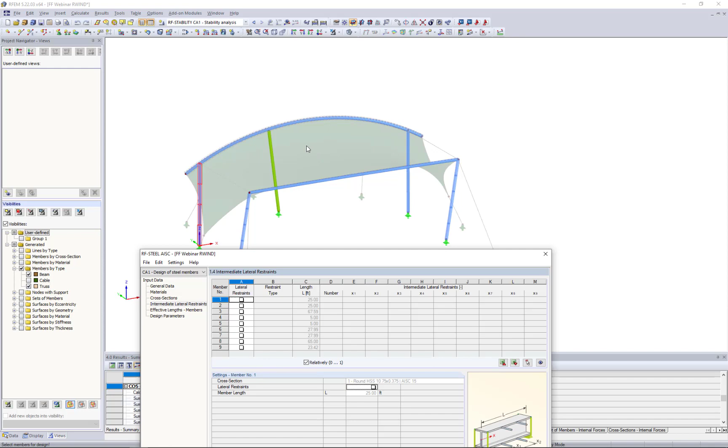Intermediate lateral restraints - this is if we had any top or bottom flange bracing, and this would affect our lateral torsional buckling calculations. In our scenario today, we have no intermediate lateral restraints. Sure, we have this fabric framing into these frame members in the lateral direction, but it's certainly not going to provide any support from lateral torsional buckling. So we'll leave all of this as empty.

The effective lengths - this is strong axis buckling, weak axis buckling, flexural torsional buckling, and lateral torsional buckling. As I mentioned from RF stability, if we are designing per the effective length method from Appendix 7, then we would want to input the effective length factors for our strong axis and our weak axis.

What the program allows us to do is integrate with RF stability. So we can set the input for all members here, and choose the effective length factor for the strong axis. I select my 3 buttons here, and these tables should look pretty familiar - this is what we would find within the AISC standard - but instead, I'm going to import from RF stability my first buckling mode shape, the effective length factor for the strong axis.

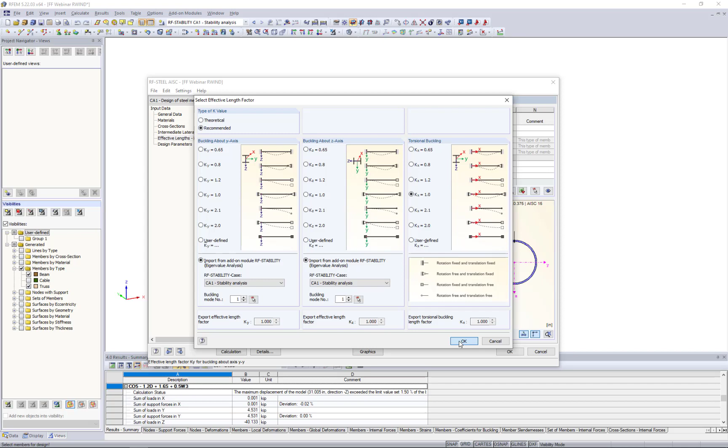I'm going to do the exact same thing for my weak axis here. So when I click OK, notice all of these K factors were automatically updated according to that first buckling mode shape from RF stability. So pretty powerful in the sense of what we can do here.

Now, in turn, if we are designing per the direct analysis method from Chapter C, the code tells us that we can set this to 1.0 for the factors, so we can just go ahead and overwrite these and set them back to the default of 1.0.

Just to quickly preface as well, if we are designing per the direct analysis method, back in RFEM, we'll want to reduce our stiffness for our members, and I can quickly show you this here. If we go back to RFEM, I double click on my members, we have here the modify stiffness.

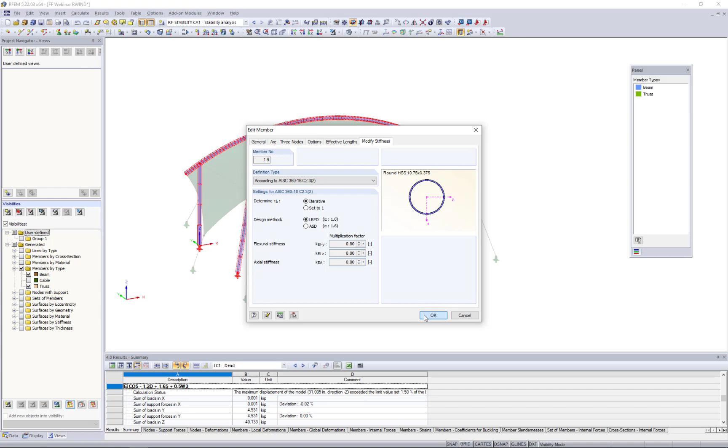This is going to apply a tau sub B stiffness reduction as well as the multiplication factor 0.8 to our flexural and axial stiffness. Again, this is just required per the standard, Chapter C, when we are designing per the direct analysis method. Those previous webinars that I mentioned really give quite a bit more information on the background of that. So just briefly touching on that.

So we're ready to run the calculation here, and we should see the module solve pretty quickly. We already have all of the internal forces being brought into this add-on module. All that we're doing is applying those different AISC equations to eventually get a design ratio, and we can view design by member, for example.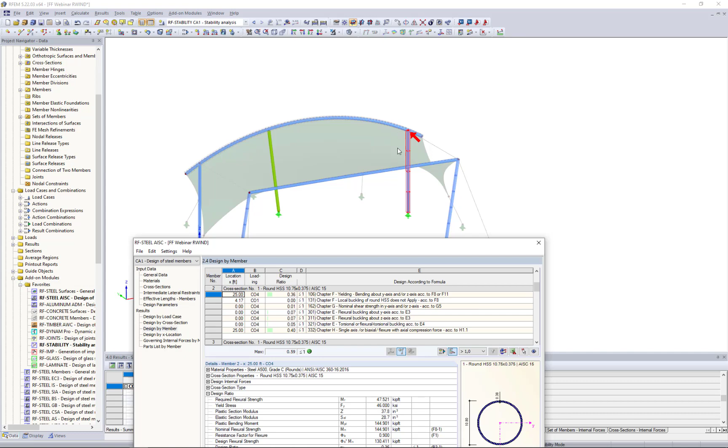And if I pull this down, notice that the program is once again synced up with this table to point me to exactly which member I'm looking at. That big red arrow is going to be the controlling internal force for that particular code check. For each member, we're also giving you all of the code checks from each chapter.

So chapter F, G, E, H. In addition to that, if we expand out some of these settings, we're trying to give you as much information as possible in terms of how the member is classified - non-slender, slender, compact, non-compact - as well as all of the variables, the code references that go into that particular design check. So pretty transparent.

Ultimately, we're getting a max design ratio of 0.59 for all of my members considered. I'd say that's quite good for our design today.

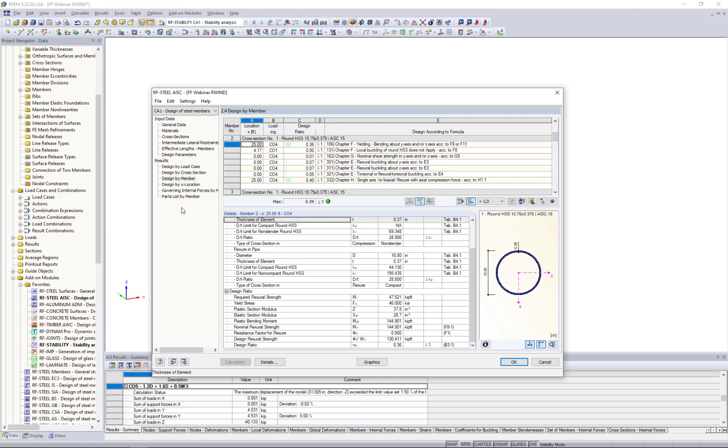The last table here, we have the parts list by member. So this is a material takeoff. We can view the total length and the total weight here, and we can export this information to Microsoft Excel, which may also be helpful for us.

Finally, we can view this information graphically as well, still within the RF-STEEL AISC module, as we can see from our drop-down box. I'm just viewing my ultimate limit state design ratio graphically, so we can see where those higher design ratios can be found along these frame members in that standalone column.

So that really encompasses the entire design process for this fabric structure, including the supporting structure for our steel members. The final thing I want to cover, which will just take a couple of minutes, is the influence of additional structural bodies or structures in general and how that plays a role with our wind loads.

Let's assume, for example, our structure today is again some type of tent covering structure, and we want to use it to cover a seating area. So I'm interested, if I place that seating area underneath my tent or canopy, how will that impact my wind loads? Because it could be pretty significant.

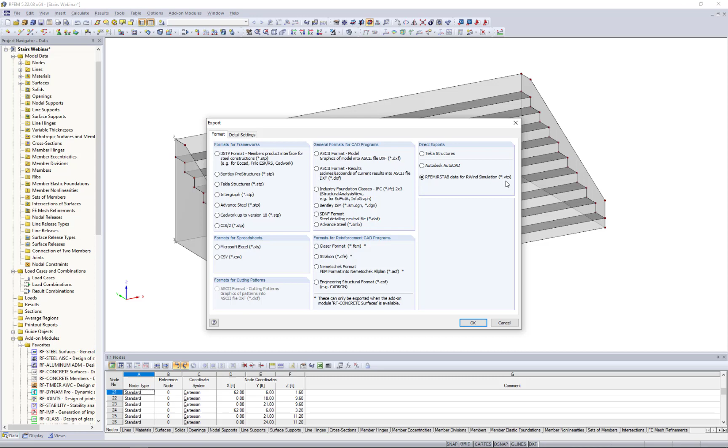What I'm going to do is go to File, Export. I'm going to use this option over on the right to export the RFEM data for our wind simulation as a .vtp file. When I do this, this allows me to save this file to wherever, my desktop.

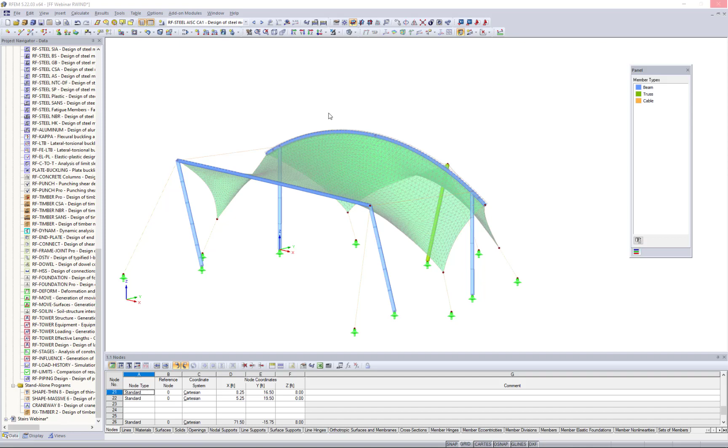I'm going to go back to my original structure here and open up our wind simulation. This same interface will populate that we previously saw where we put in all of our wind settings, and it's taking just a minute to populate, so we'll give it a second. But essentially what we're hoping to do is incorporate the two models together within our wind simulation.

So under the load cases, for wind in the 270-degree direction, we want to open our wind simulation for this particular case, and the program will launch our wind simulation. Let me try that again - open in our wind simulation.

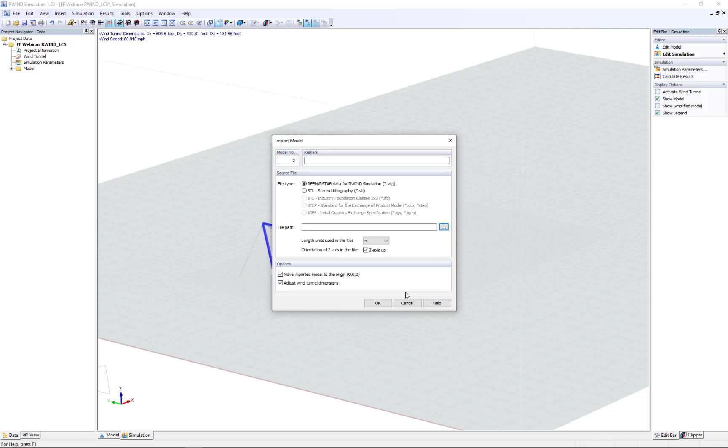We're going to export this tent structure, nothing that we haven't seen before. But this time, under the model tree, I'm going to right-click and import the model from the file - this is that .vtp file that I just created for my seating structure. So I select this stair file, click Open, click OK, and now these stairs are automatically available to me within my RF wind tunnel.

Now we obviously need to change the orientation of this structure quite a bit. We certainly don't want the seating to be only half covered. So we can do so by either double-clicking on the stairs - we can change the position according to the X, Y, and Z, or the rotation. What I like to do is simply right-click. We can also manipulate it if we're not so concerned with the exact location here.

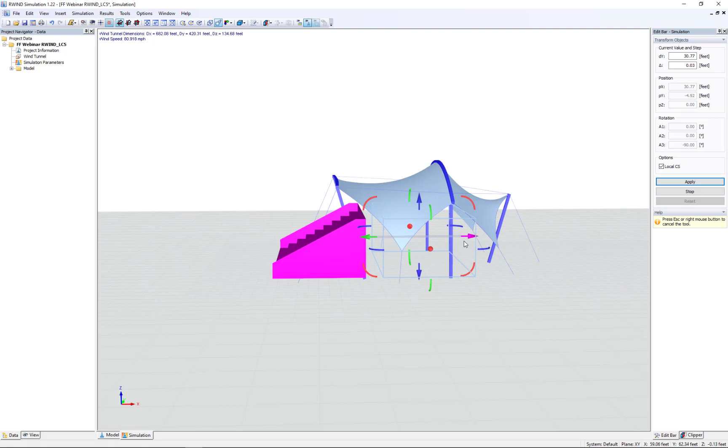So I will essentially rotate it. I can also move it to the left or the right, or front or back, all graphically within the model. Maybe we take a look at the orientation from the X direction just to further move this structure a little bit over to the center. Okay, so now you can see the stair structure oriented underneath my tent.

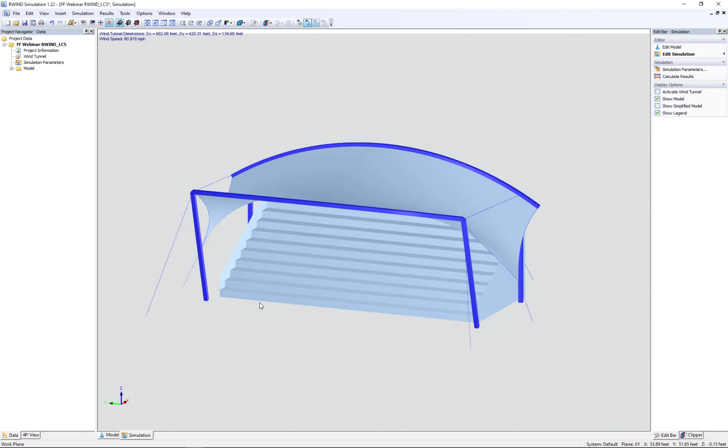Ultimately, we'd want to start this calculation for results within our wind simulation. Again, it does take just a minute to solve. So what I've gone ahead and done is solved the model already, and we'll jump to this.

We're going to see pressures now once the calculation is finished, even on our stair structure. But again, we're not so interested with this - we're more interested in the pressures and how they're affected on the actual tent structure itself.

And what we might use is the streamlines again. So we previously covered the streamlines. Essentially, these are going to show the direction and the magnitude of the wind, but now they're also going to consider this additional body underneath the tent canopy.

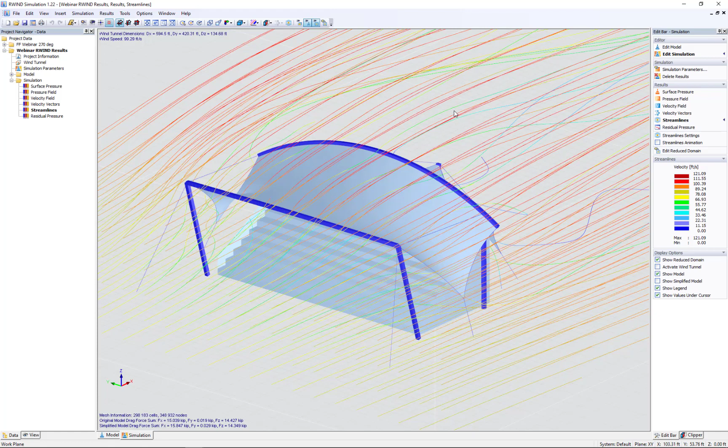We can edit our streamline settings, and I can use these modifiers here to change the geometry of my streamline box, and we'll set this to something pretty small. I also want to move it over to the center of my structure. Maybe we change the orientation here in the X direction again. We can also change the height of these streamlines as well.

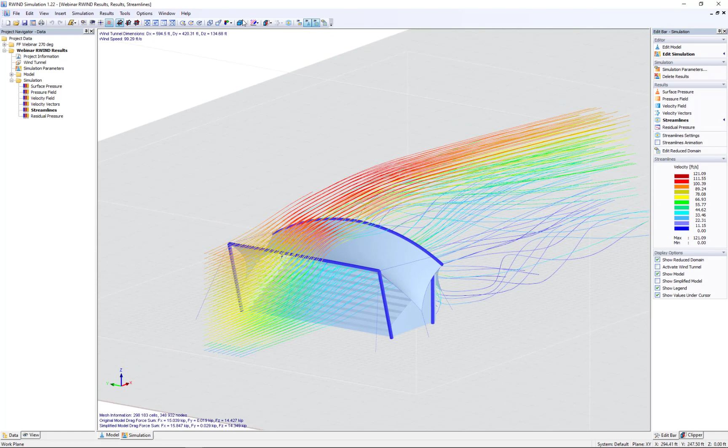So when I click OK, I'm only going to see the streamlines passing right through the center of this structure, through this rectangular box. The easiest way to probably see this is if we change the orientation here according to the Y direction, so we can see exactly what the wind is doing. It's hitting this stair structure here, passing up over the top and then passing out through the exterior of the tent. Notice the extreme change in velocity here.

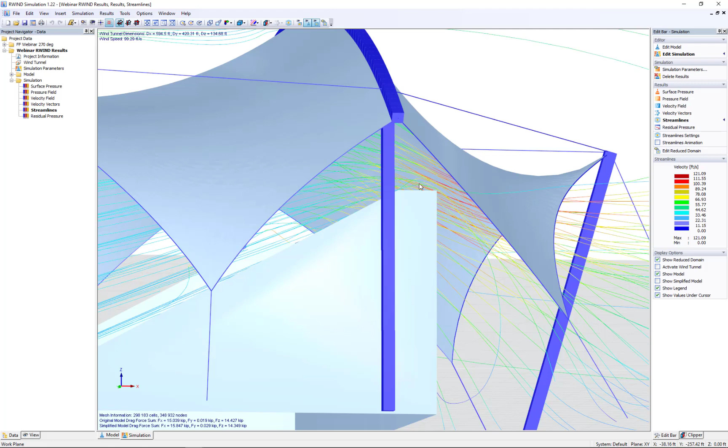So we could probably deduce that someone sitting at the top of this stairs, or this stadium type seating, is going to experience much higher velocity than somebody sitting at the bottom. And we can turn this back into the Y direction. What also is powerful is let's turn on our streamline animation.

For this, I've set this to particles to follow those streamlines, and you can see them hitting this stair structure and then kind of passing out through the top. Additionally, we have the wind, of course, just passing through the top here as well. So pretty powerful, again, in just understanding the influence of additional adjacent structures, or in this case underneath our structure, and how the wind loads will be affected.

Now, ultimately, like I said last time, the surface pressure is what's going to be most important to us. We can export this information back out to RFEM, and maybe we have 3 additional load cases for wind loads to consider the addition of this seating structure below it. So quite powerful again on how we can use our wind simulation integrated within RFEM for wind design.

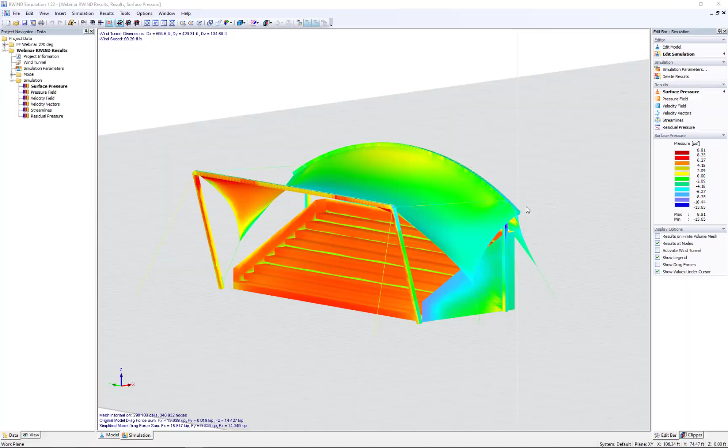So I will conclude today's webinar and jump back to the PowerPoint here.